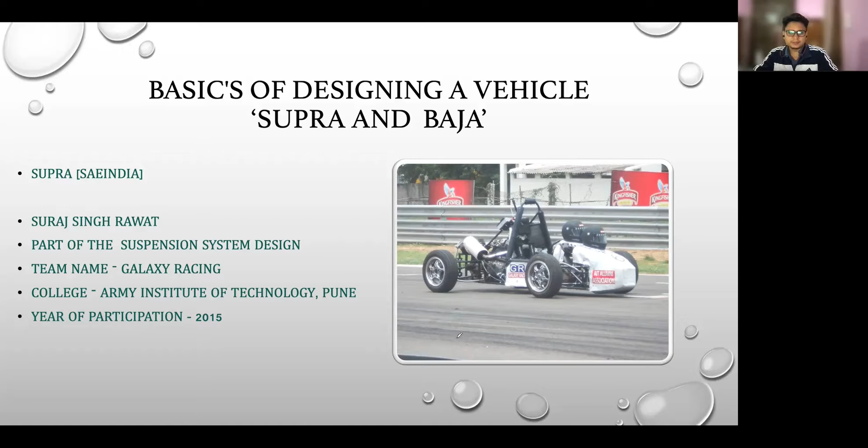Let me introduce myself first. My name is Suraj Singh Rawat, and in 2015, my team named Galaxy Racing participated in the Supra competition, and we were among the finalists.

This is a picture I found of my team. You can see that I'm sitting here. Our team had around 16 members, and I just want to mention one name, Sri Ram. He was one of the core members of our team, and he had a great contribution in the whole success of the project and the team.

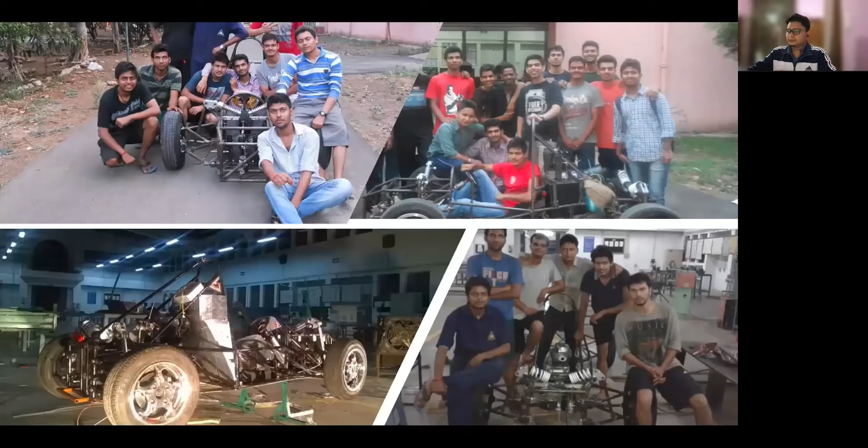Some more pictures highlighting the different stages of the vehicle we built. The vehicle was loaded in the workshop. We just finished the installation of our engine, and some other pictures.

Okay, so let's now see the procedure of the competition and overview of the whole life cycle. The first thing is you have to register for the competition. It could be a Baja or it could be Supra.

Whatever I'm going to explain is in general. There could be a little bit of difference with respect to different competitions, but moreover they are similar. So the first thing someone has to do is form a team.

If you're in your college third year or maybe in the beginning of the fourth year, you have to form a team, decide a captain, and a number of candidates will be mentioned, like how many members could be there in the team. You form a team on that basis, and then you have to register your team on the portal.

Then there will be a timeline to prepare your documents and other things for the first round. So what is the first round? In the first round, you are not supposed to show any model or physical component or anything.

It's more like you have to give a presentation or documentation where you explain your strategy and your plan. It's good if you can create a virtual model and demonstrate it there. It's more of a round where they judge your strategy, your initial idea, and your planning. From the first round, a set of teams get shortlisted for the second round.

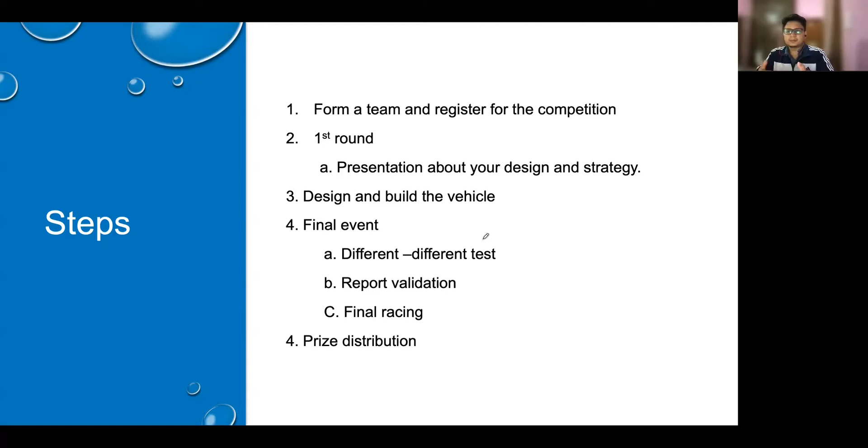Once that is done, there will be a last round, which is the prize distribution - who is the winner, who is runner up, and who is the winner in different categories. Okay, so that is the overview of the competition.

Now let's go and see the functional areas. I call them functional areas because they are the big umbrellas. There will be other works and other areas we have to complete, but they come under these four umbrellas only. This is the actual time where you will spend most of your effort.

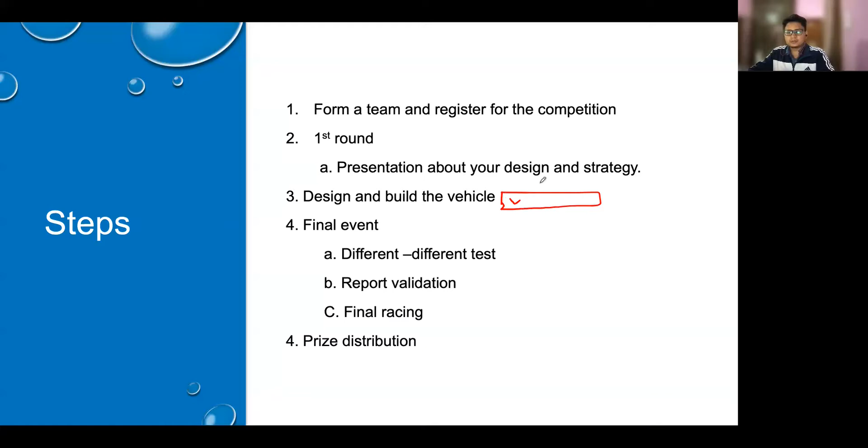Now we are going to have a view on this part. Your team should be divided into four. They have initial responsibilities, but they are not the only things the team will do, because everybody has to contribute and engage with each other - it's teamwork. But moreover, you have to assign people for the different roles.

So this roll cage and outer body team will be responsible to design and create the outer body. You can see in this picture, this roll cage is the outer body, which is the actual structure - you can say that's the bone for the whole vehicle. All other components - engine, suspension system, braking system, pedal, or anything, even the outer body cover - will be mounted on this. So this is the actual one which will be sustaining all the endurance, all the impact and everything.

And they have different criteria. You have to design this part very well. We'll discuss it in more detail further on.

Okay, so now the second one is the team who will be deciding about the transmission system. This team will be responsible to decide which kind of engine we can go for, all the assembly related to it, maybe the vibrations, axle alignment, and all those things. So basically they are deciding the complete engine set.

Then the third one is the suspension system, where I was primarily involved. The suspension system design team is responsible to design and build the whole suspension system - the arm, push rod, spring, roll center, camber, caster, toe, turning, and all those calculations. This team will decide the best fitted suspension system for our vehicle. So there are many things that come under this.

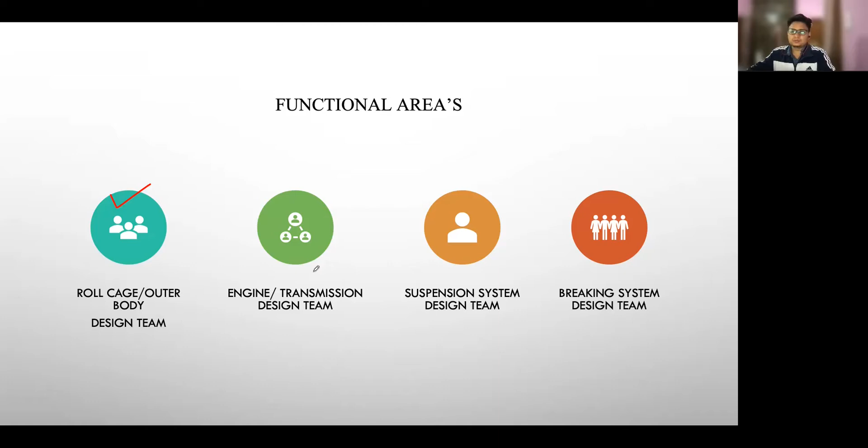Then the minimum braking track and all those things, we will explain later in the presentation.

This roll cage or outer body design team are the people who design initially the whole roll cage, the wireframe body, which will be built by the pipes or rods we buy, and then bend them and weld them, make the particular angles and all those joints and all those things.

So you can see that they have to define this wireframe on the basis of the following - there could be more, but these are the primary ones. So this mounting point is a very important parameter.

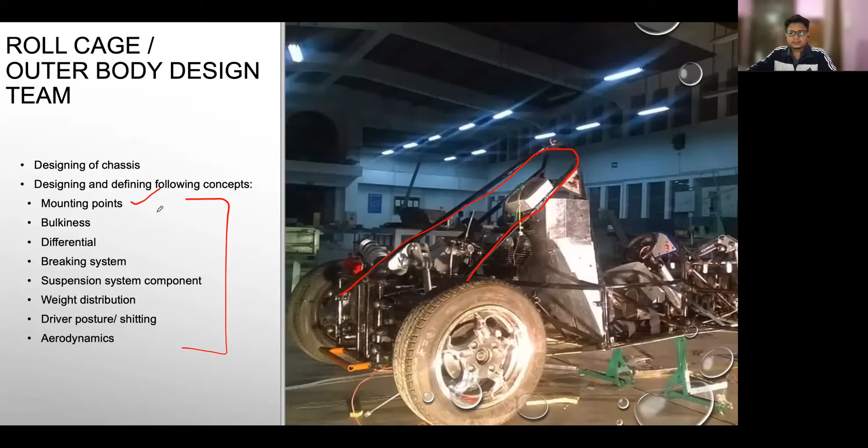They have to decide, basically it's a communication between the design team and all other remaining teams. So let's say if I'm a suspension system person, this team will ask me what kind of suspension I'm going to install, what is the assembly, where this assembly will be mounted, what is the space needed, and all those things. On the basis of my input, I will say my spring will be mounted at a particular angle on the back side of the vehicle.

So you can see that here my springs are getting mounted. So there's some joint I need, so that I can mount them here. There will be an eye joint mounted on this roll cage that will hold the corner of these two springs. So the roll cage team has to create this backside of the vehicle in such a way that they give us a joint here.

It should be symmetric. They should not be unbalanced as well. The challenge is this team has to design the roll cage but minimize the weight. They have to get the maximum strength while optimizing the weight. If you can make a good mixture, getting good strength at minimal weight, then your design is a good design. But if you have good strength with a very heavy component, you haven't done a good optimum design.

For the steering, we need something where this steering rod can be mounted, and at the same time there should not be too many bars. So they have to design it in such a way that this chassis is strong enough that it doesn't bend, but it's not too bulky.

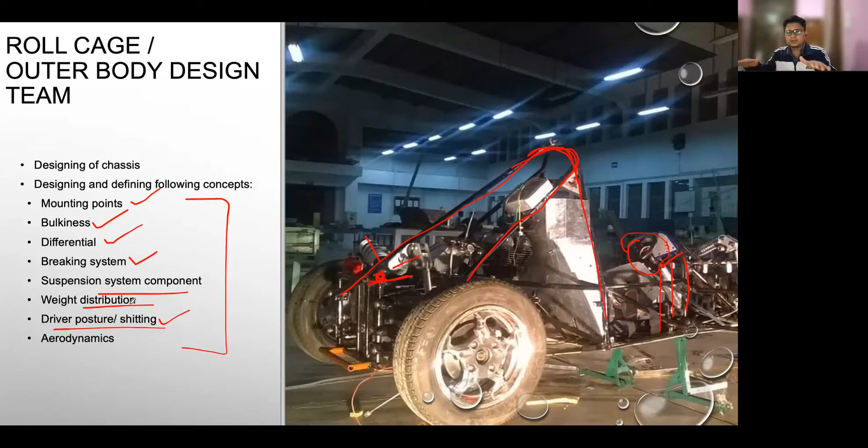Suspension system component, weight distribution, driver posture and sitting. Weight distribution is pretty well understood - it should be constructed so the weight is distributed equally. The recommended point is the CG should be somewhere below the driver position. That is good practice. You can move it a little based on your design, but moreover it should be somewhere below the driver seat. So those kinds of things are also parameters to be considered.

Then aerodynamics, very important for the efficiency of the vehicle. When your vehicle is completely built and you are trying to boost it, if it is not good in aerodynamics, you will get a lot of drag, and that drag will kill your efficiency. So you should be considering all those things.

I think you might get a good idea about it. I will be creating some more videos where I will discuss all these things in much more detail, and maybe demonstrate some calculations and paperwork. So that is about the roll cage. Now let's move and see the engine and transmission system team.

For the competition, there will be specific criteria to decide the engine. You should be smart to decide an engine where you can get more power with less weight, less consumption of petrol, or higher torque at lower gear. It all depends upon the type of vehicle.

Let me give you an example. If this vehicle is designed for Supra, it needs high speed, so torque in the lower gear might not be that important since you're not going to run it at a lower gear. But for acceleration there's a twist - you need high torque in the beginning for good pickup, but at high speed, especially in higher gears, you need good speed.

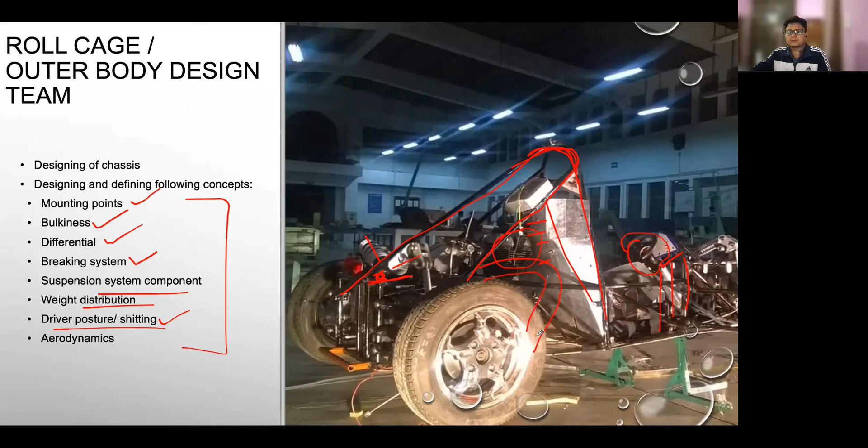Insulation is obviously important, because the engine emits heat, and there's exhaust with very hot air coming out, which should be insulated well from the driver. There's a layer you might have seen in the vehicle that's formed only to insulate this component from the driver. The way of the exhaust should be well designed so it's not hampering and does its job smoothly.

But at the same time, the angle of the exhaust is very important, because if it is against the air flow, the way the hot air comes out might create some drag, which could hamper efficiency. But at the same time, we need some back pressure for the exhaust. So those kinds of tweaks and learnings are there.

Pedal design - take example of my team, we used a bullet engine, which is a two-wheeler engine with a single lever to switch gear. But the gear shifter in a four-wheeler, which we designed for this competition, was for four-wheeler design. So how to make this assembly to move that four-wheeler lever movement to our bike engine assembled behind the driver - those kinds of four-bar things you might have learned in engineering. So you basically design that connection, so that pedal getting pushed presses the two-wheeler engine lever in such a way that it mimics the gear shifting.

And the battery and other components - every engine has different sensors and all those things, so you should be pretty much smart to install it properly on your vehicle.

So two-wheelers have this tilting sensor, so once the bike tilts, it automatically gets switched off. That has to be properly managed in your four-wheeler.

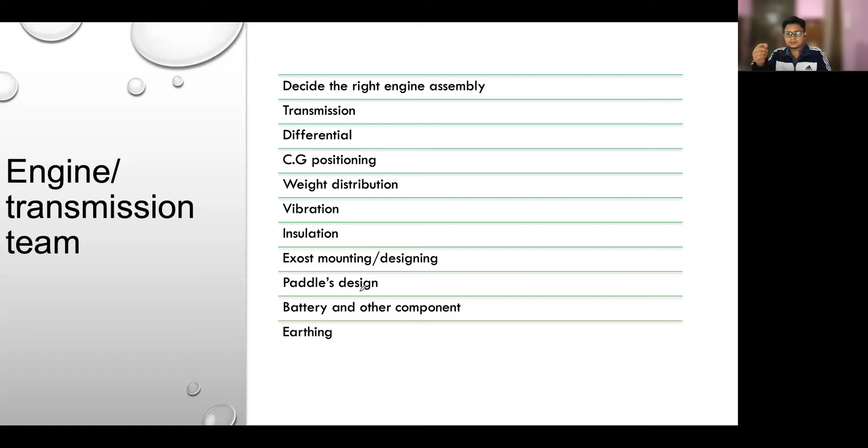Another challenge we faced during the competition was that the switches in our engine were getting shocked, and short circuits were happening, and we weren't aware what was happening because we didn't have anybody from the electrical and electronic team. We found that the way everything was done with the battery in the four-wheeler was different from what we had done before. So we tried to fix it in real time, and that was a great achievement - we were very happy once we overcame that challenge.

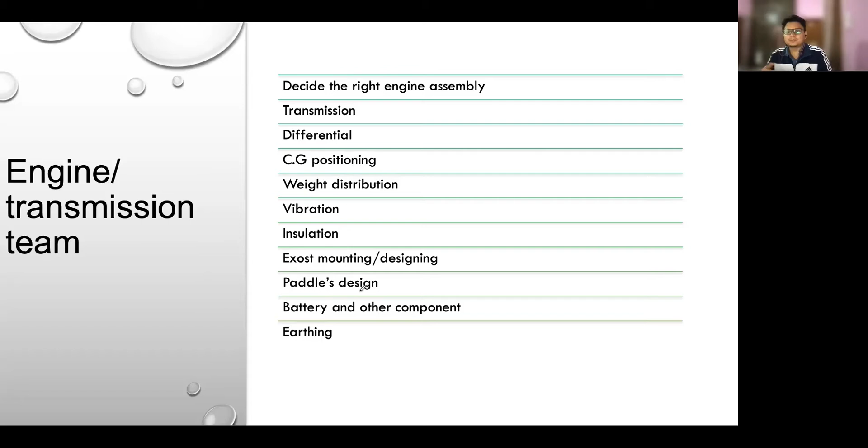Now come to the suspension team. This team has to design the whole suspension system, which is a combination of the suspension type - maybe you're proposing an arm with push rod - then you have to think about the mounting, the upright, and the camber, caster, and all those angles. These are very important angles for turning, braking, and the overall vehicle performance.

While you're in the suspension team, you should be very much aware of a couple of things, like the approximate weight of the vehicle once everything is loaded, including your driver, because that is the weight which will come on your springs.

There's a certain movement you need - you're designing your wheel such that it should move by 2mm, 3mm, 5mm, and for a certain weight, this movement should be well transferred to your springs. Your springs should have a particular stiffness, and a free length, and there will be a compressed length. You have to calculate so that the movement is well distributed and the spring is optimally compressed - it should not be compressed too much, otherwise it might break the spring or transfer vibration to the vehicle. You have to think about it and work on it.

Then there's the upright design. In this picture you can see a component here which holds the wheel, while also allowing the axle to pass through it and rotate the wheel. So this is the component which actually holds your wheel, at the same time allows it to rotate, but gives a space and position for the steering to push the wheel in the direction we want it to rotate.

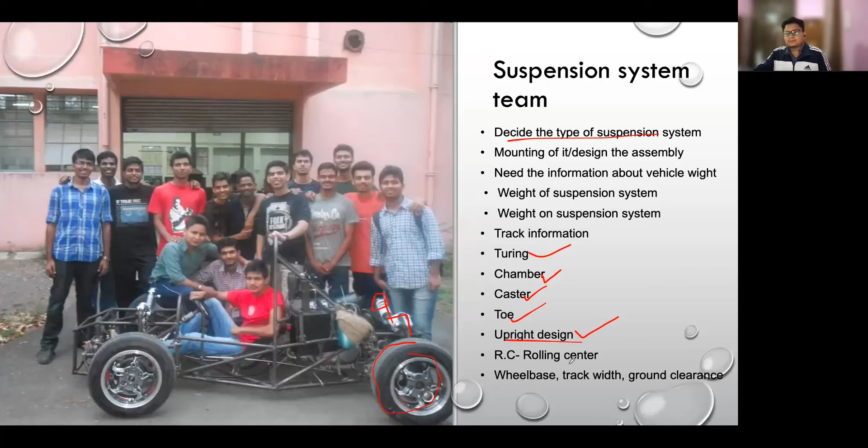Then there's the rolling center, a very important component - this is the point about which the whole suspension system moves. Let's go with this picture: if this is the front and your suspension system is moving this way, here's how the roll center plays its role - this is the front, you're looking at your vehicle, and this is the wheel.

So if your wheel is going up or down, this is actually a hypothetical point about which the suspension system is rotating, in simple words. So the actual idea is to keep it as much as near to the ground, but we can't go...

...ideally with the ground, because the arm positioning becomes little critical, and that hampers the movement of the wheel. What I'm trying to say is, if you go too much near the ground, then these arms of the suspension might tilt in this way to make a cross section at this point, and that might resist the movement of your wheel in the upper direction, because your arms are already too much bent, so there is no space here for the movement of this rod. So that is the actual compromise we do to hold it here.

So a couple of other things are like the wheelbase, track width, ground clearance, and all those things are the points which the suspension team has to decide. I think that is a pretty good overview of the suspension system.

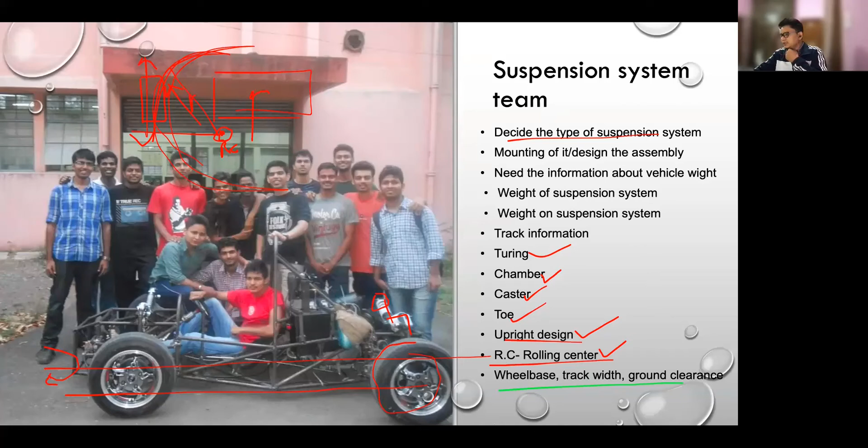Now let's move ahead and see the fourth one, which is braking systems.

A point I want to mention here is that practical and theoretical, they both have different worlds. So when we are in engineering, we design things theoretically on the basis of equations and all those things. But if you see industry, you'll find that when the industry is doing any kind of design, they do a parallel check of the availability in the market. So you should be pretty much clear about the manufacturing processes available nearby you, the materials available nearby you, your cost, efficiency.

What I'm saying is, let's say you design a component which is very efficient by engineering and very finished, but it's a waste if you are not able to build it or manufacture it. So what is the hurdle?

The hurdle is where you are living and what is your reach in the market, what kind of machining processes are available. So if you don't have a laser cutting machine available nearby you, and you are doing a sheet component with sharp cornering and all those things, saying that we need this component, I think you're making a fool of yourself, because you're not going to manufacture the component. So what you need to do is think about the processes available and then do your designing on that basis.

Parallelly, we go for some standard available component in the market, let's say the steering system. Designing and manufacturing the whole steering is not an efficient way. So what you should do, or what we did, is go for an efficient steering system and try to manage it with our vehicle, and did the designing of the vehicle in such a way that we could afford that steering. It saved a lot of our time, a lot of efficiency efforts, and even gave us some advantage from that particular component.

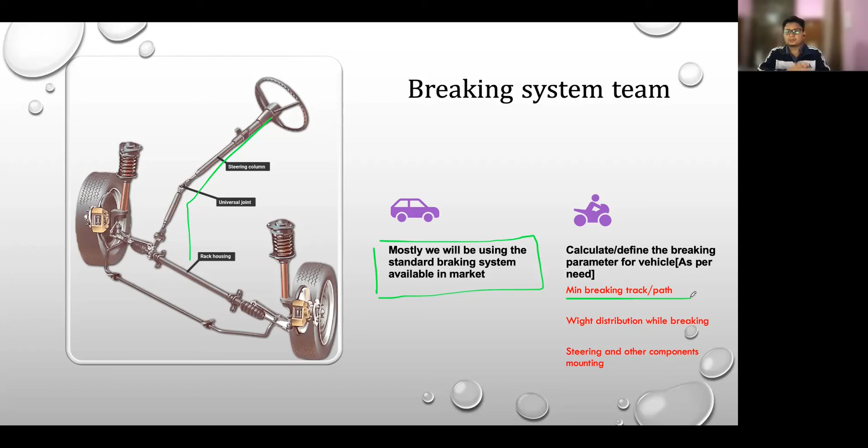The steering and other component mounting I already mentioned - the body should be designed so that all components are well mounted and spacious with respect to each other. Space should be good enough, but not too much space, otherwise the size of the vehicle will increase.

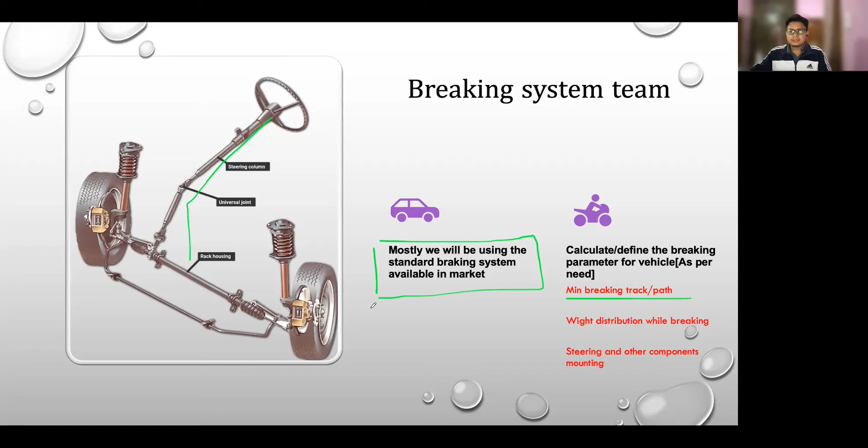So I think those are some of the criteria you should consider, and these are things you'll learn as well as face during your participation. Now let's come to the challenges I want to mention - these are good challenges.

First point is availability of your design and need of component. What we faced, and what you will also face, is that whatever design you have in mind, when you try to design it, you'll find few things which are not available in the market. You'll find resistance there, like you've designed something needing a certain joint bearing, arm, operation, bending, or grinder, and those are simply not available.

So available components will be a difficult thing. As a mechanical or design engineer, you should consider these issues and the standard parts available in the market. You shouldn't always stay inside your own world just thinking about good ideas - your idea should be well validated against the resources that are actually there. Any industry, when doing the design, parallelly does a practicality check as well.

Management and communication within the teammates - this is one great learning. One of the biggest challenges is communication between teammates, how to motivate them, and keep the momentum of your team. When you go into this kind of competition, it's not a one-night success.

Every day you'll be creating components, doing things together, and facing failures, because it's not like you design something, go to your workshop, do something, and get a final component right away. No, more than 90% of the time things will break. Even till the last day of the competition, you'll still be doing something - welding, grinding - that's the practical reality.